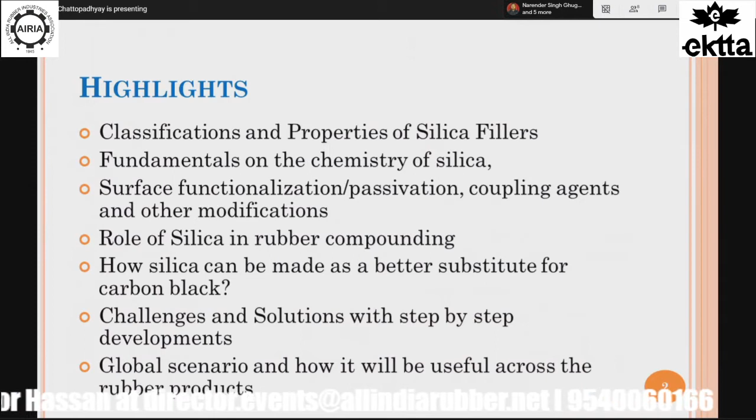Before going into details, I'll give you a quick highlight. I'll try to tell you the classification and properties of silica as a filler, then the fundamentals and chemistry of silica by which your tire, your rubber product, will be rolling, the surface functionalization and coupling agent -- that's the crucial role there -- and the role of silica in rubber compounding, how different it is compared to traditional carbon black compounds.

And then, how can you make silica a better and better substitute? Can I make it 100% substitution of carbon black at the end? What are the challenges you'll face, and then solutions step by step? And then the global scenario across -- can I really adopt it in a wide gamut of rubber products? So that's what is going to be the theme of today's talk.

Before I go into details, it's my duty to introduce you to my institution. I belong to IIT Kharagpur, as it was introduced. In fact, IIT Kharagpur is the first IIT out of the first 5 which were established immediately after the independence of India. So IIT Kharagpur was the first, followed by IIT Bombay, Delhi, Kanpur, and then Madras. Over the period of time, we have become 23 in our IIT fraternity now.

It's almost across all states of India now. If you have a look, IIT Kharagpur has 45 departments, centers and schools, and 30 plus specialized R&D centers. For your information, our campus itself is located on around 2,200 acres of land -- it's so huge, itself like a small municipality. If you look at broad disciplines, we cover almost all engineering disciplines, from computer science to naval architecture to mining, anything you can name. And then we are into the basic sciences, biosciences, social sciences, management, and also law, entertainment, and entrepreneurship everywhere.

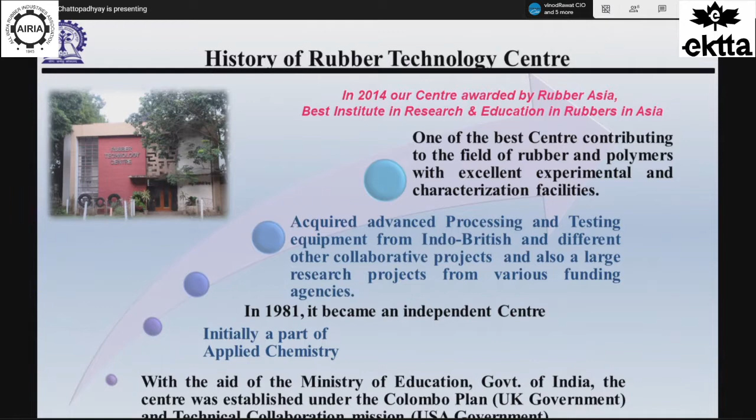We have many programs. We not only teach Masters and PhD students, but also offer a lot of short-term courses. For industry, we offer courses training the manpower, which is part of our curriculum. We also host international conferences and so on.

We have about 6 faculty members today, working in various areas of polymer science and rubber technology. I am currently leading the center. Other than faculty, we have 4 non-teaching staff, about 46 MTech students, and 50 PhD students.

Most importantly, see our impact on the country. Although we are small, in the last 5 years we have published more than 4,000 publications in international journals, patents, book chapters, international conferences, and many more.

Now coming to the location of IIT Kharagpur, it's a little far from Kolkata, about a 2 to 2.5 hour journey by car from the Calcutta airport. But we are really well connected by railways—at one point the Eastern headquarters was Kharagpur. If you look at the map, we are equidistant from Baleshwar, Jamshedpur, Kolkata, Kalyani, and Haldia.

This part of the country pioneered rubber and polymer technology, and there were a lot of industries around. I'll show you the industries IIT Kharagpur caters to: Himadri Chemicals, which makes fillers, Phoenix Conveyor Belts in Kalyani, Exide Battery, Haldia Petrochemical, and Birla Tire in Baleshwar. It's almost like a circle surrounding us.

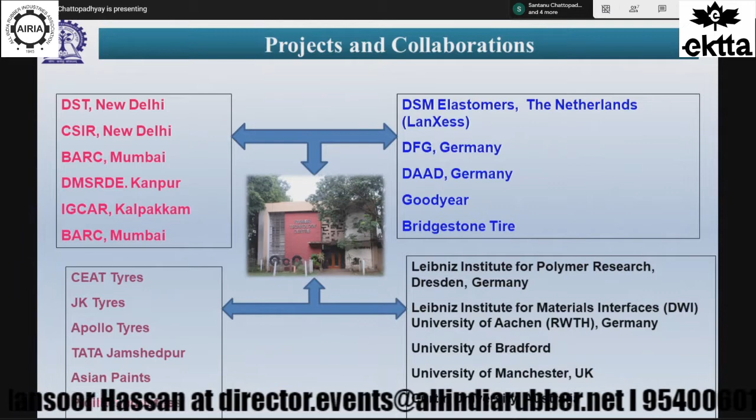If you look at the kind of tie-ups we have, we cover almost all government agencies. We are tied up with big multinationals like DSM Elastomer, Michelin Tires, Bridgestone Tires, Goodyear Tires, and more. In the Indian scenario, we work with most rubber industries and rubber forums, including AIRIA, where I'm a regular speaker and sit on some program committees. Globally too, we are in great touch with most prominent rubber and polymer institutes.

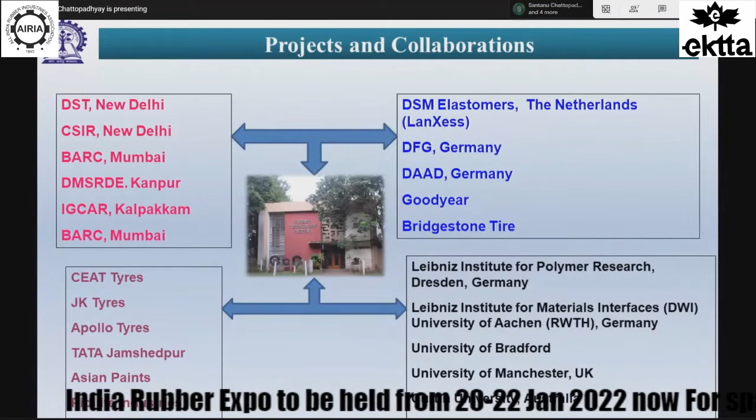We also have exchange students, and professors regularly visit for deliberations and more. This is how our global presence looks—we are all over America, Europe, Australia, New Zealand, Korea, and Japan. Many collaborations are either already there or coming up.

Coming to my research group, where I work, my research is organized into 5 verticals.

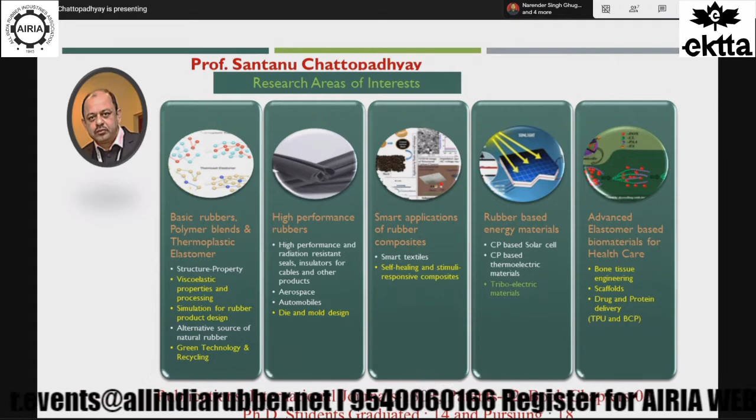The very first vertical is the basic rubber, polymer blends, thermoplastic elastomer. In that, we work with structure property, viscoelastic property and processing, simulation for rubber products for the die and mold design. Say, for example, alternative source of rubber. Say today the natural rubber source is not there, or there is some problem, so what will be the natural resources? That also we work with. And of course, the green rubber technology and recycling.

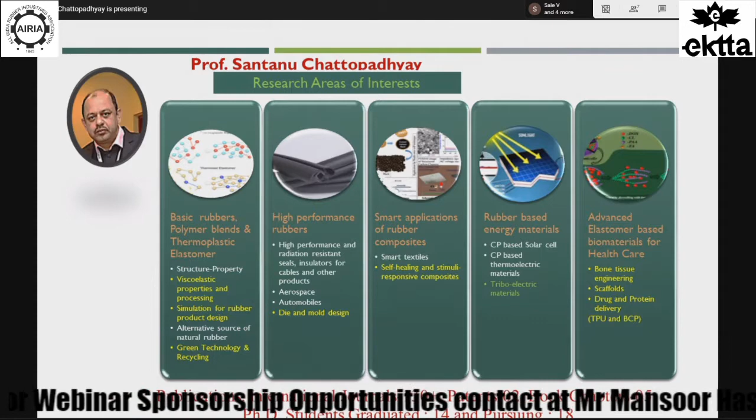So today's talk broadly covers the green technology in the line of silica, basically. Other than that, we work with high performance rubber that includes automotive, aerospace, and mostly very critical applications like high performance seals, O-rings, hoses. In smart applications, today is a smart world everywhere. I work on smart textiles, self-healing, and stimuli responsive polymers as well.

In the energy facet, today there is a huge crisis of energy, so rubbers are not far off. If you look at rubber polymeric material as a solar cell material, thermoelectric material, triboelectric material, that is very important. If you really do friction, can you harvest the energy out of that?

Another facet: in today's COVID situation, you can realize how important drug and antiviral delivery is. In that facet also, we work on stimuli responsive and controlled drug, protein and vaccine delivery, scaffolds, and bone tissue engineering. Of course, this is not today's focus. I'm going to focus today on a different area, which is silica, but that comes under the verticals of basic rubber and polymer technology.

So without taking much time, I'll straight away take you to my content. I'll give a quick introduction, then the history, how silica was developed, then classification and properties, and surface chemistry, which is very important. Rather than the bulk, the surface is very important for fillers. The role of silica in rubber compounding; carbon black and silica we'll compare, to see where silica has edges and where the disadvantages are. The basic challenges you face once you adopt silica as a replacement of carbon black, the solutions, the worldwide demand, and finally the references you can consult.

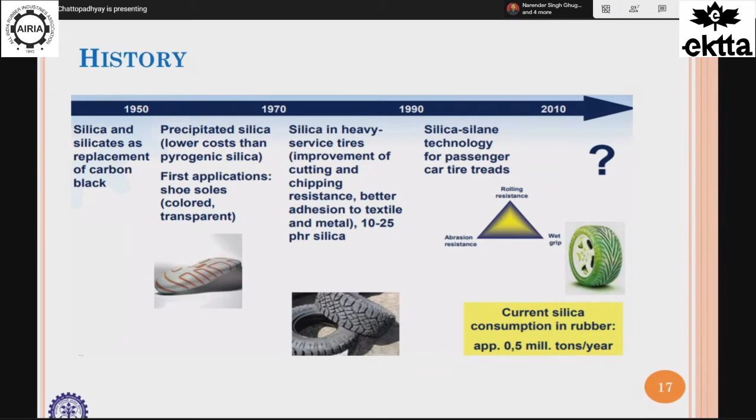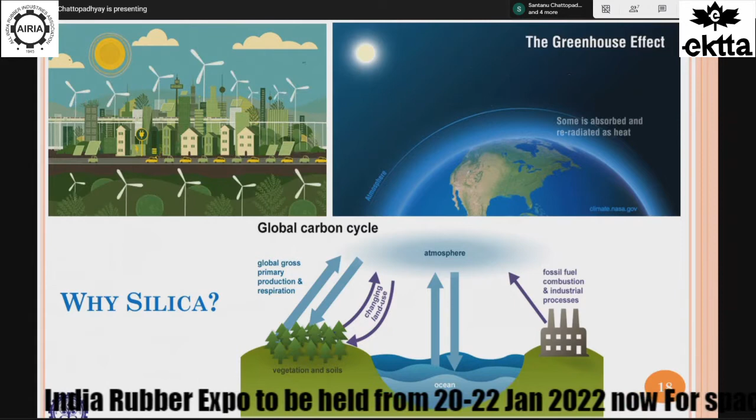So in order to make our earth green, in order not to have this sort of interference from carbon, silica is probably one of the major solutions. Because you can imagine how much carbon black is consumed in the form of rubber, keeping aside the other uses.

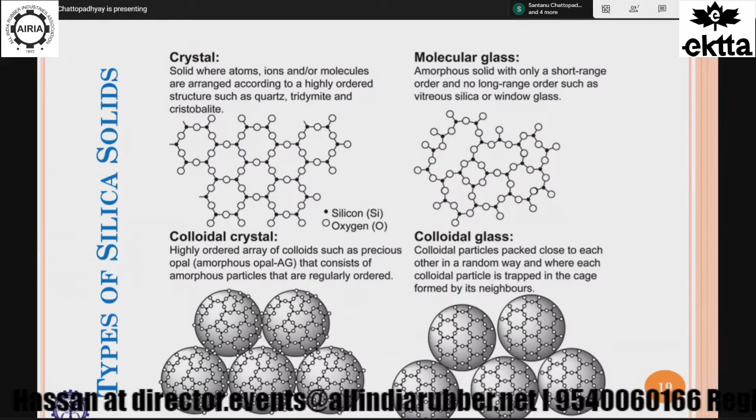So now taking you to a little bit of the chemistry and physics of silica first. If you look at silica and the types, as I said, it is crystals. It appears in the form of quartz, for example. It can be molecular glasses. Molecular glasses means it's a little bit hexagonal, but a little distorted. So it doesn't have a long range order, it only has a short range order. The very first example is vitreous silica, your window glasses.

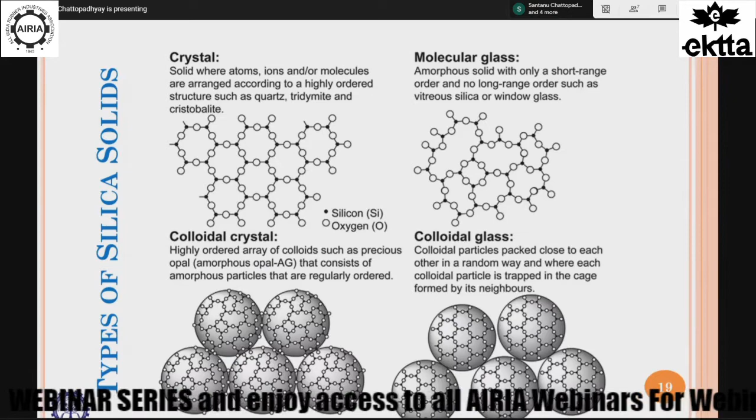Another form of silica is colloidal crystal, like amorphous opal AG, for example. That has a regular order, but in the colloidal form. And there is, of course, colloidal glass. Colloidal glass is the same as colloidal crystals, but it doesn't have a long range order.

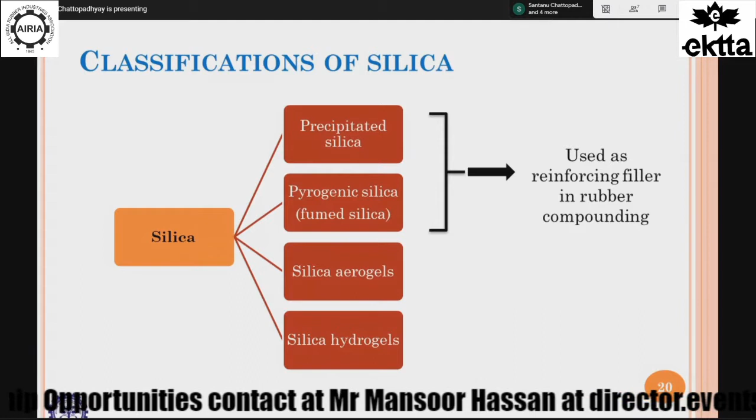Now, coming to our business, if you look at silica from our point of view, you have precipitated silica and pyrogenic silica. I'll elaborate on what is what. These two are mainly used as reinforcing fillers in rubber compounding. Two other forms of silica are silica aerogels and silica hydrogels. They have different uses. I'll elaborate a little later.

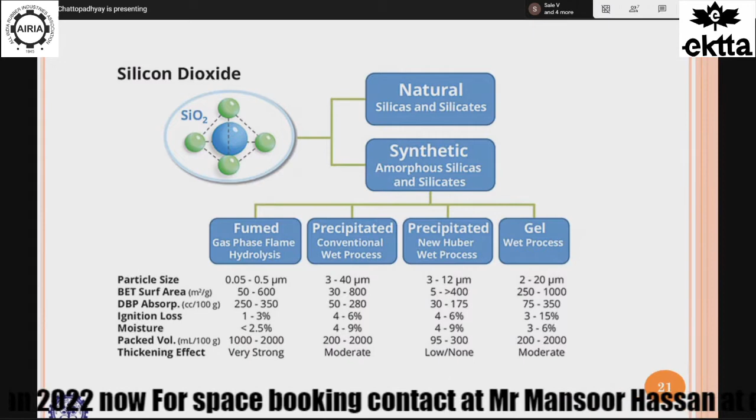So now coming to silicon dioxide, as I said, you can get it from natural sources or make it from synthetic sources. But if I try to categorize them, I can get fumed silica or pyrogenic silica, which is made by a gas phase flame hydrolysis reaction. The second one is precipitated silica, which today's talk will mostly center around. Then precipitated silica in another variety by a new Huber process. And then the gel or wet process silica.

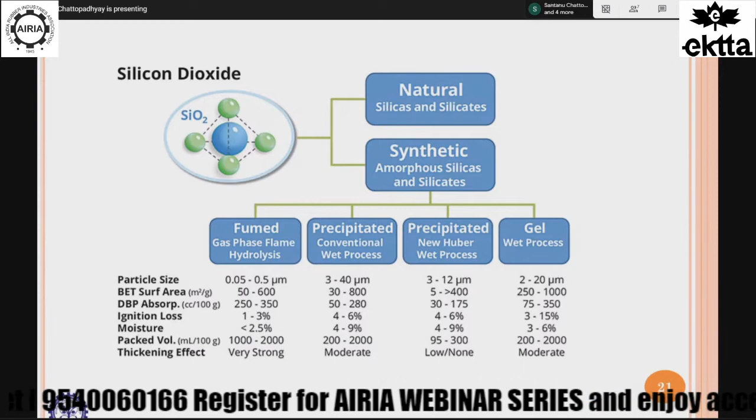Down there, some of the properties are jotted down. If you see, the particle size of fumed silica is probably the smallest. Of course, the gel also has a small size, but BET surface area, everything is changeable basically. But moisture content is a very important factor. If you look at fumed silica, it's always 2% or less. Sometimes they exaggerate 2.5, but it's actually less than 2%.

And if you look at precipitated silica, on the contrary, it is sometimes 4 to 6%, sometimes it can go all the way to 9%. And that is very important, the moisture content. So I'll take you back here in the subsequent slides.

Now taking you to the precipitated silica, because our point of focus is precipitated silica. The chemistry is very simple. You have a sodium silicate, you acidify it. Once you acidify it, it will form a salt, like sodium chloride in this case, and it will give you silicon dioxide. Similarly, if you react with sulfuric acid in presence of oxygen, it's oxidizing media, it will form sodium sulfate and silicon dioxide. So this is the chemistry of forming the silicon dioxide from the sodium silicate, which you mostly get from natural mineral sources, basically from the sands.

But although the reaction seems very, very easy to you, three important things you have to remember. One is the temperature during the processing. Second is the pH in which you actually precipitate. And third is the time of processing. So this makes a difference.

So for example, if you do it at a very low pH and a long time, you get a conventional silica. But if you do it at a high pH and short time, you get what you call today HD silica. There are a lot of markets here today. And if you do it in between, you can get a semi HD silica. So that is the chemistry. I'm not going into it; that itself would take a full day lecture.

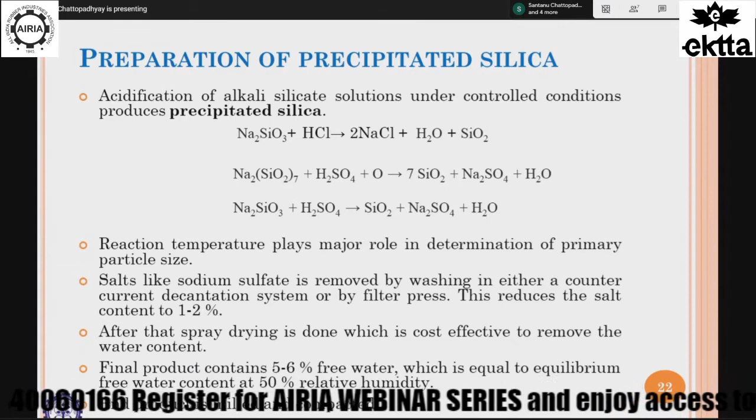But nonetheless, once you make the primary form of silica particle, you have to wash it. You have to wash it with a countercurrent decantation system, or there is something called a filter press, by which the salt content should be reduced as far as possible in the final silica. It should be of the tune of less than 1% sometimes, if you really want a better quality silica for users.

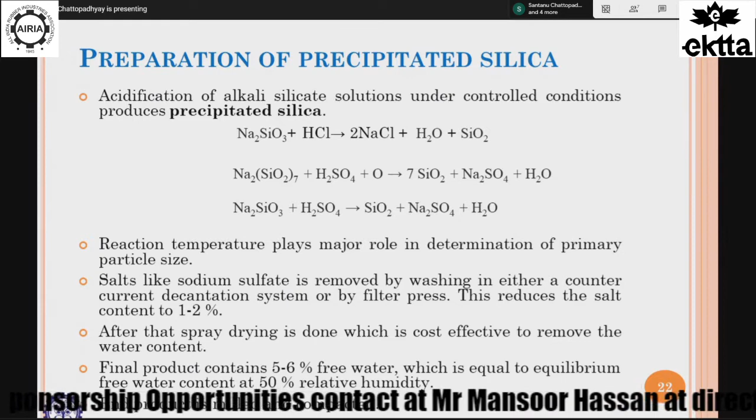And then you have a spray drying system, because you still have 30-40% water in the filter press. So you have to reduce it. The final water content should be 5 to 6%. That is very important. And then finally it is milled, compacted, packed and sold to the market. So that is basically the process.

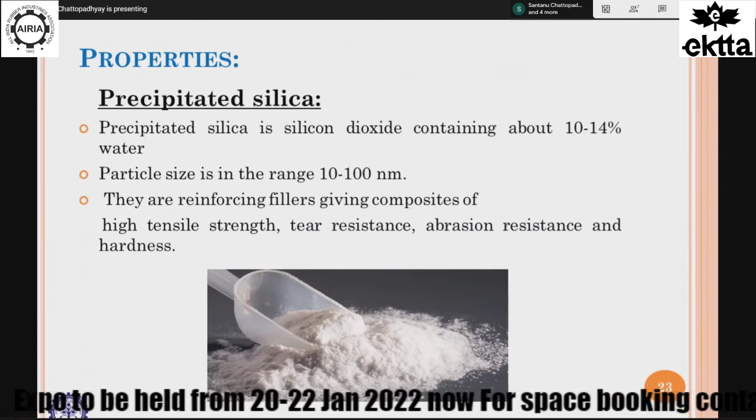So now if you have a quick glance at silicon dioxide made by the precipitation or wet process, you call it precipitated silica. Although it's a little exaggerated, 10% moisture content; it should ideally be less than 6% for good quality. Otherwise, you have to really dry it while compounding with rubber. The particle size is of the tune of 10 to 100 nanometers, but talking about particle size is very tricky because silica exists in aggregated form. That is most important. Carbon black also exists in an aggregated form, but the aggregate size compared to carbon black is finer. I'm coming to that.

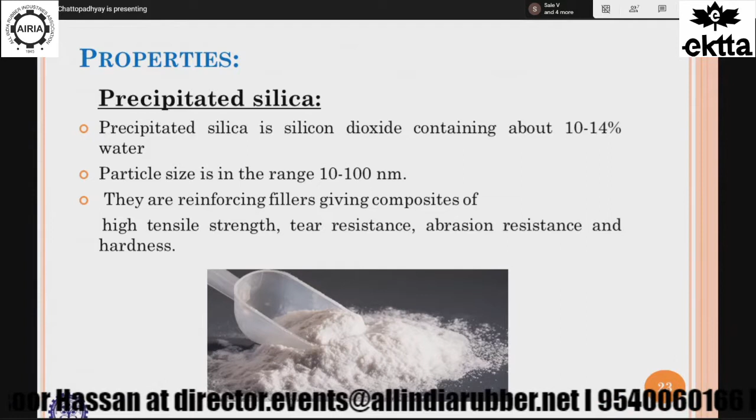So this gives you a primary particle size of less than 45 nanometers. That gives you the optimum reinforcement. Thereby you can improve the tensile strength, tear strength, abrasion resistance, and all the failure properties.

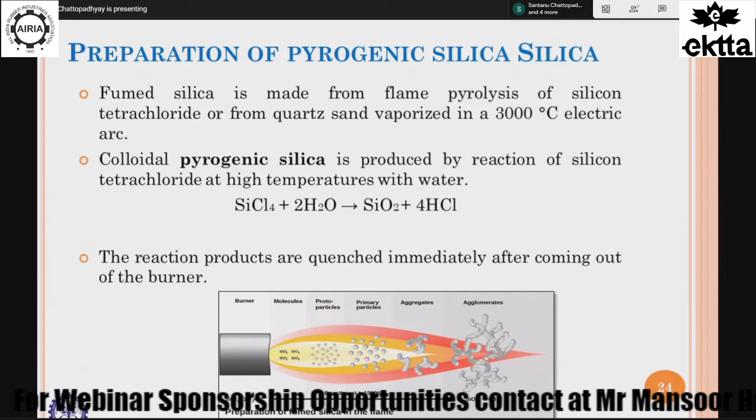Now taking you to pyrogenic silica. Pyrogenic silica is made from chlorosilane, basically silicon tetrachloride, and it can be made directly from quartz also. The temperature is very high, and once silicon dioxide is formed by the reaction of water and SiCl4, it has to be immediately quenched, and then subsequently processed. Since the process is very high temperature, your moisture content is much less. As I told you, it's less than 2% in this case.

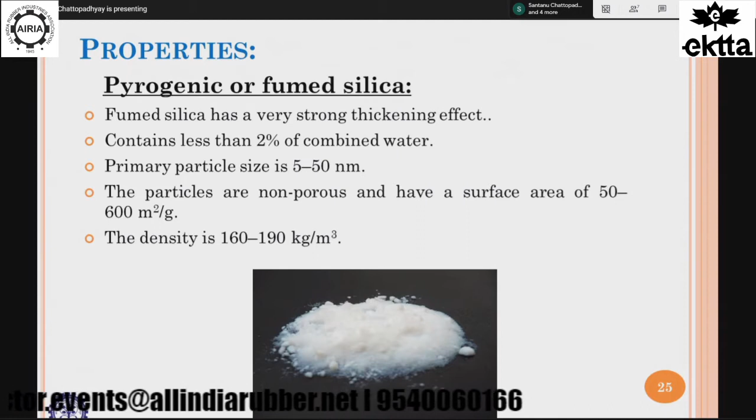So let us have a quick look at fumed silica, for example. Fumed silica has a very strong thickening effect. It's very, very hard, just like soft clay versus hard clay, for those who know. It contains 2% or less combined water. Primary particle size, remember, is 5 to 50 nanometers. The state of aggregation is quite less, but it aggregates because of this particle size. And it has a huge surface area. As for density, if you compare carbon black and these two types of silica, carbon black is a little lower density compared to silica, but there is really little difference.

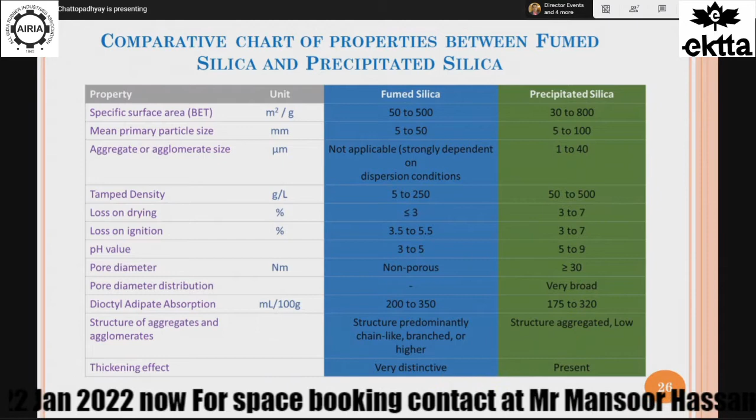So I'll stop over here. Just have a glance through the slides. That gives you a very good comparison between the basic properties of fumed silica versus precipitated silica. Starting from specific surface area, that is very important. Higher the surface area, higher the reinforcement, basically. And then mean particle size, different types of density, and loss on drying. Loss on drying is related to the moisture content.

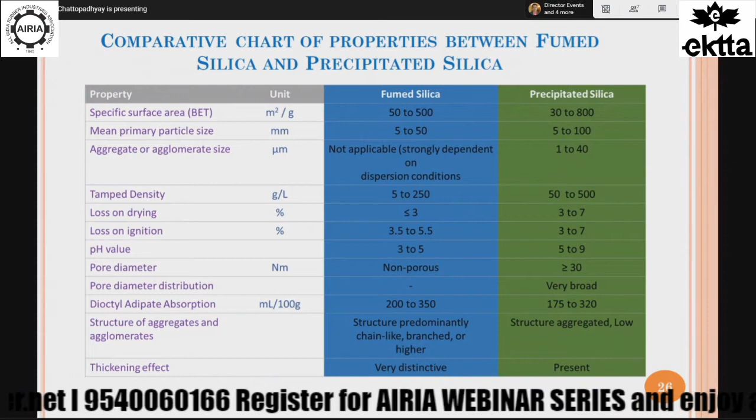pH value plays a very, very important role, because when you vulcanize rubber, most often your acceleration is done because of basic conditions. So if you have a little basicity, that's how carbon blacks are modified.

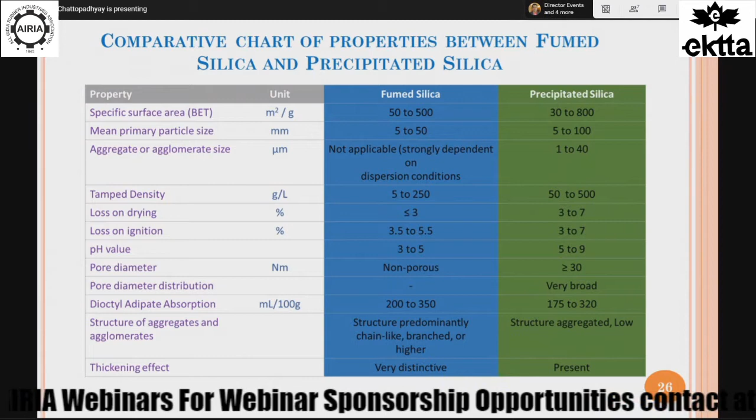Vicinal silica is highly hydrogen bonded, so you cannot effectively use that functionality to tailor-make it to reinforce a rubber. The isolated silica, designated as Q3, and the geminal silica, which is Q2, are the most reactive SiOH bonds that you can actually functionalize. So these two groups play a very critical role.

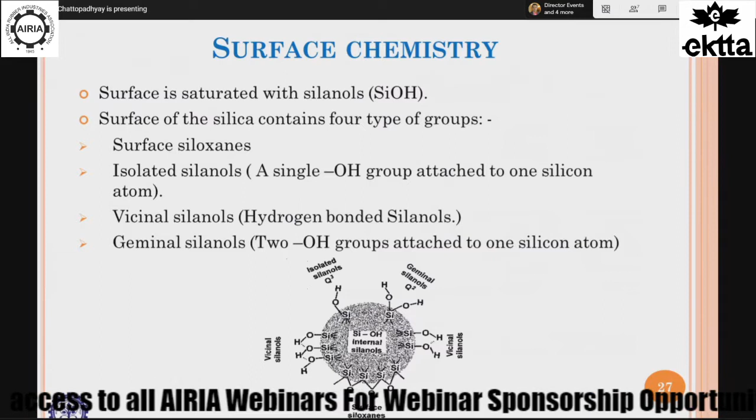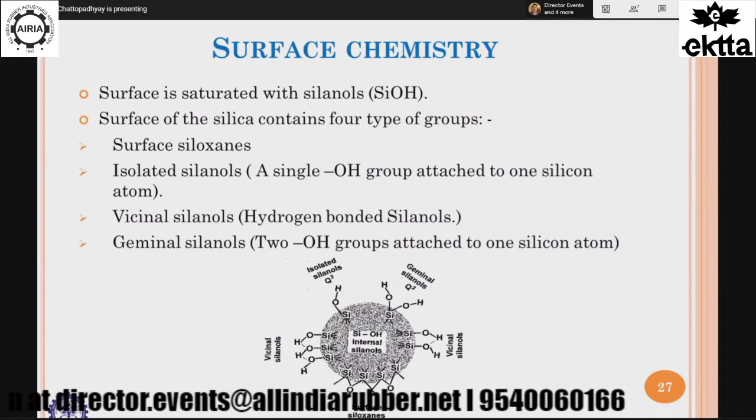Now I'm coming back to precipitated silica vis-à-vis fumed silica. Fumed silica, as you make it at a very high temperature, has less SiOH content compared to precipitated silica. That makes fumed silica difficult to disperse in the rubber matrix, because with a coupling agent it will not be that easy to couple. So, a quick recap: fumed silica has less moisture, which is an advantage, but less functionality, which is its utmost disadvantage for effectively reinforcing rubbers. Does it make sense?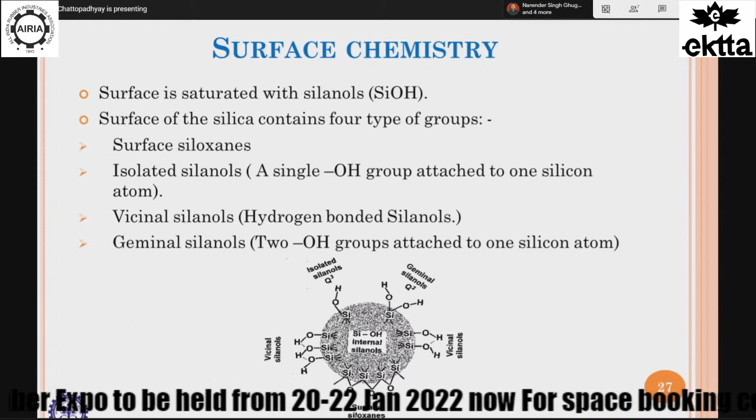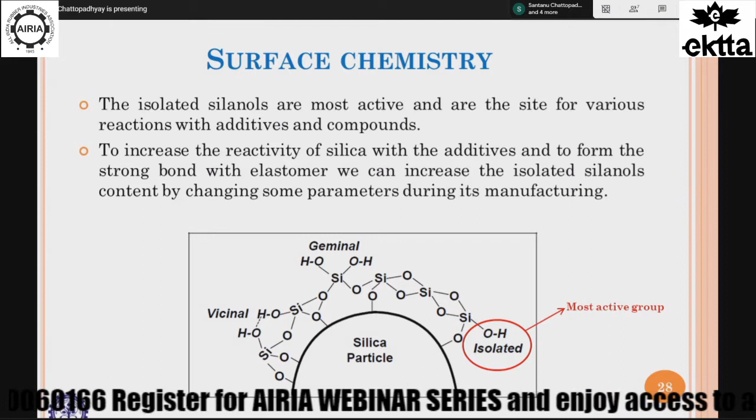Once again, you have 4 different types of functionality. Of those, recall 2: your free SiOH group and your geminal SiOH group. Geminal means Si(OH)2. These 2 groups play a crucial role when you put more and more silica into the rubber. In the cartoon, vicinal is strongly hydrogen bonded. Si-O-Si, forget about that, because all 4 valencies are satisfied. The most reactive is the isolated silanol, next the geminal one. That's what we'll play with in the next 2-3 slides.

Schematically, Si(OH)4, silicic acid, condenses and forms Si-O-Si linkages that propagate in all 3 dimensions, forming the surface. This is a xerosol, and the xerosol ultimately forms your surface functionality by condensation and dehydration mechanisms: SiOH, which is isolated, and Si(OH)2, which is called geminal. These 2 are very critical for our subsequent applications.

Now let me compare the surface chemistry of silica with carbon. In the periodic table, carbon is at the top and the next row is silicon. Carbon in a form like graphite is conducting; silicon, of which semiconductors are made, is semiconductive. To the right of carbon you have nitrogen, then oxygen. For silicon, next is phosphorus, then sulfur. So most of silicon's chemistry centers around sulfur and phosphorus, whereas with carbon your playground is carbon, nitrogen and oxygen. That's what you see in the cartoon.

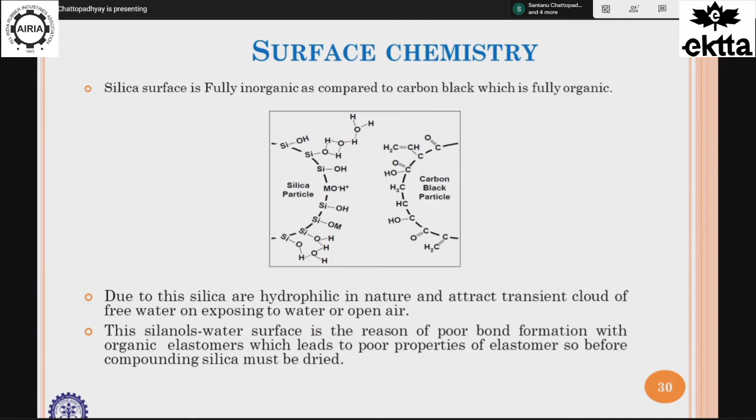Now my point is that I understand I have given a silica, but how do I know how much reactive or active functional group I have in that particular filler per gram? Okay. So for example, how much SiOH groups are present there? That is very, very critical. So to do that, you have to do characterization. What do you do? One of the major characterization techniques is NMR.

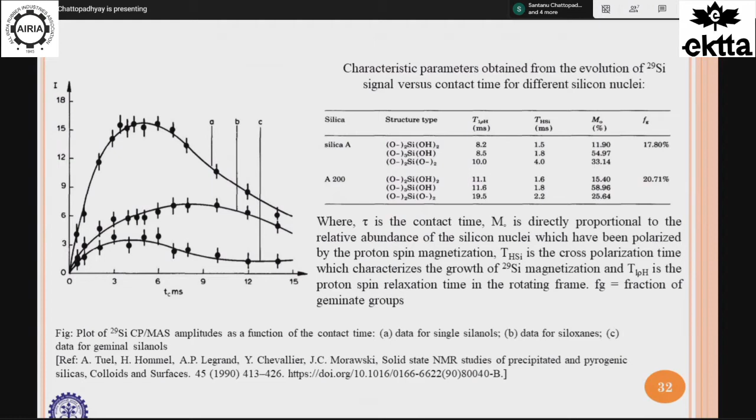So ultimately, if you integrate it, you will get how much percentage functionality you have. And depending on that, you choose your coupling agent or modifier on the silica surface so that you can optimally bond silica with the rubber surfaces. The next important characterization technique will give you the clue if my formulation is working or will be working, either in the development stage or in the quality control stage. This machine also costs you like 5 to 7 crores. It's a very expensive technique, but we recently procured it in rubber technology in IIT Kharagpur.

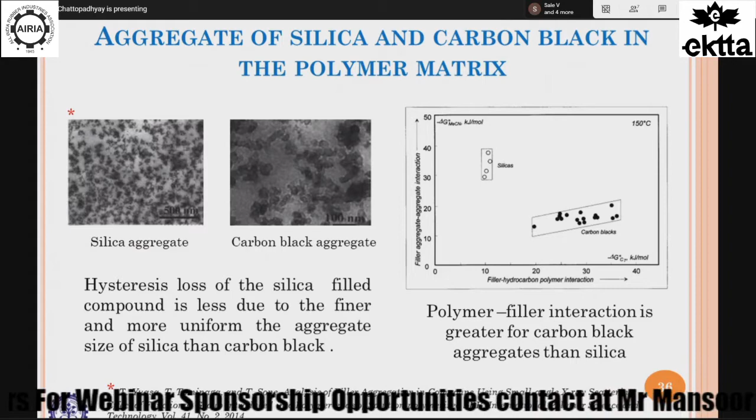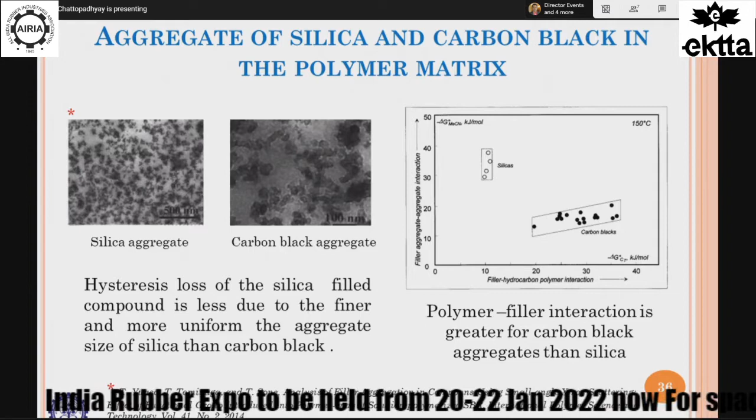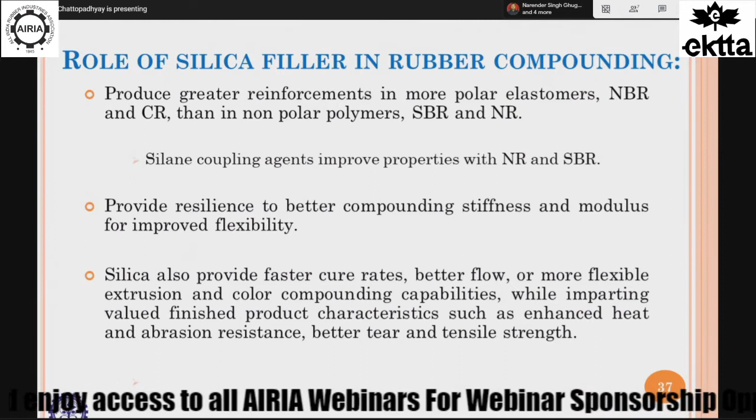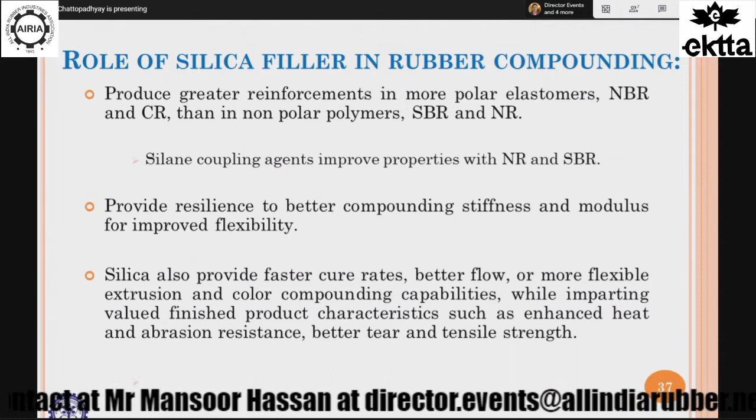Now, the role of silica in rubber compounds. There's a basic principle in chemistry: like dissolves like - it happens in society too, we only mingle with people we like. Silica has higher surface energy compared to carbon black, so naturally it goes well with polar elastomers like NBR and chloroprene rubber. But with natural rubber or SBR, silica has a natural inhibition to mix well because it's more polar while natural rubber and SBR are non-polar. So you have to somehow make it better, otherwise stiffness and modulus improvement won't be good. Nonetheless, silica has inherent characteristics - it gives faster cure rates, better flowability, and more flexibility during extrusion because the aggregate size is smaller, provided you use an optimum coupling agent while optimizing the finished product characteristics. So it gives many advantages, but ultimately its processing and mixing is a little trickier compared to carbon black.

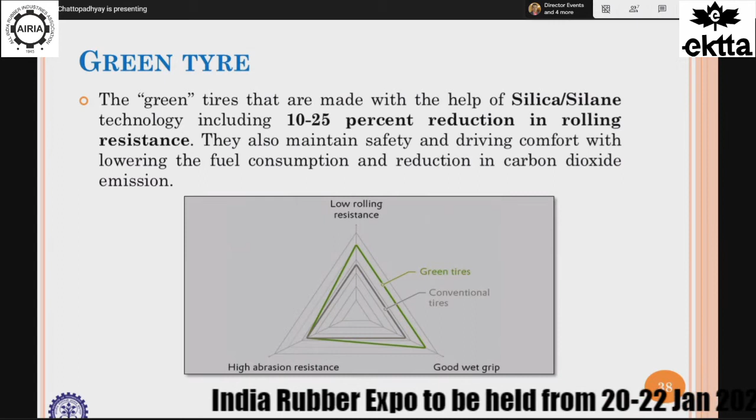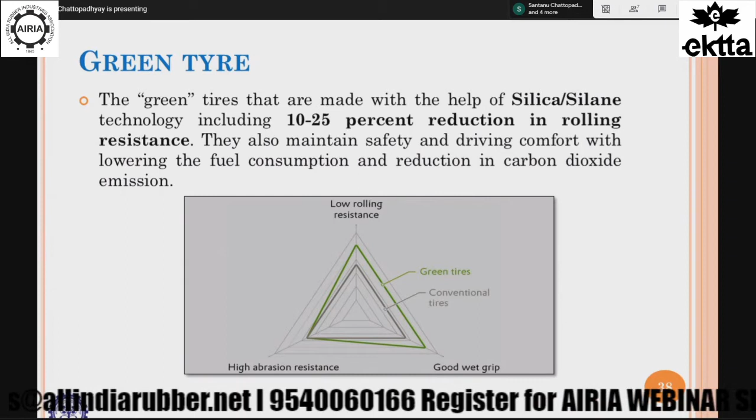So what is the green tire concept? Green tire doesn't mean it looks green in color, or that you've changed everything to eco-friendly additives like plasticizer and oil. The major component in a formulation after rubber is filler, and in many cases filler dominates. If you incorporate silica with silane - there's also non-silane technology I'll highlight - you get a 10 to 25% reduction in rolling resistance, which gives roughly 7 to 10% fuel savings. This has to maintain safety and driving comfort. There's a magic triangle showing rolling resistance, wet grip - especially important for winter tire applications - and abrasion resistance. You have good rolling resistance and wet grip for safety, but if you can't match the cost in today's world, it's very difficult to sustain.

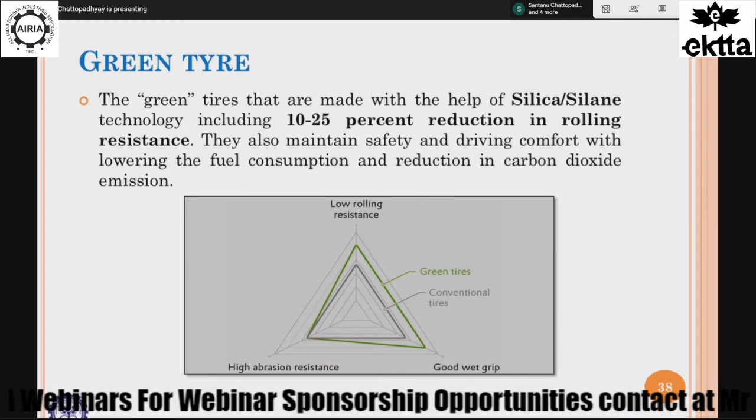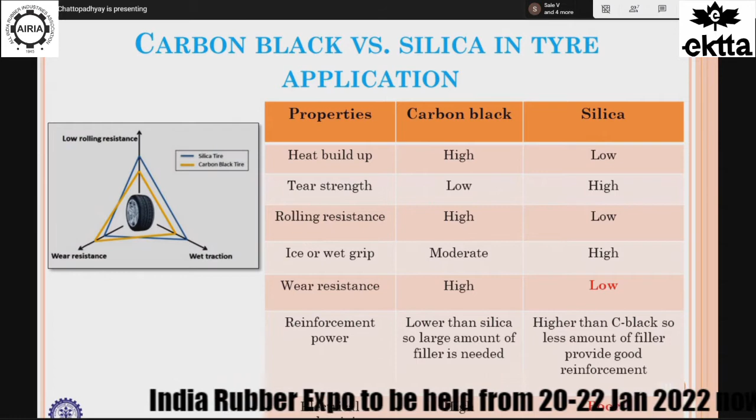If you look at the magic triangle comparing carbon black filled versus silica filled compounds, silica wins the race everywhere, except where abrasion resistance is a little lower, and for electrical conductivity. Electrical and thermal conductivity are very important - silica is a non-conductor both electrically and thermally, so it doesn't have avenues to dissipate heat. If it can't dissipate heat, there will be failure because heat accumulates and causes failure from there. That's another drawback you may face, though it can also be addressed - that's another topic I won't discuss today. Also, carbon black is a good UV absorber, while silica is not. So once you make a fully substituted compound with no carbon black whatsoever, by whatever technology, you have to compensate for wear resistance, electrical conductivity, thermal conductivity, as well as UV resistance.

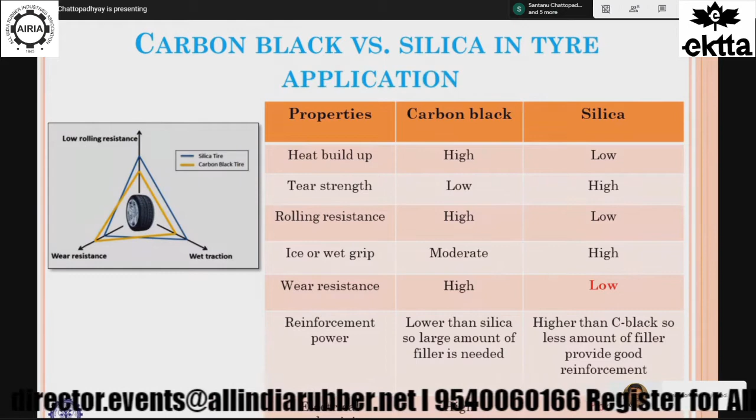The very utmost and first challenge is to disperse. Silica has a tendency to aggregate and re-aggregate, basically. That's what it's called, flocculation. So that you have to circumvent by changing the suitable mixing technique.

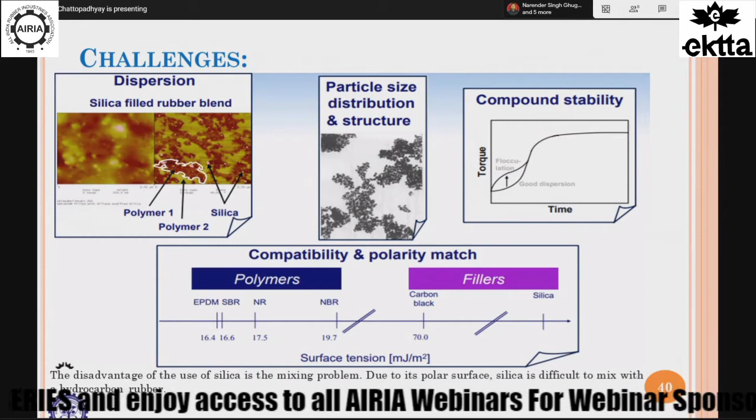For your information, with SBR, a lot of R&D has been done. They have done functionalized SBR with some functional group at the end. You have grafted SBR with different types of agents that include some sort of accelerator molecules, basically. But the point is that even if you do it, you cannot really substitute 100% carbon black.

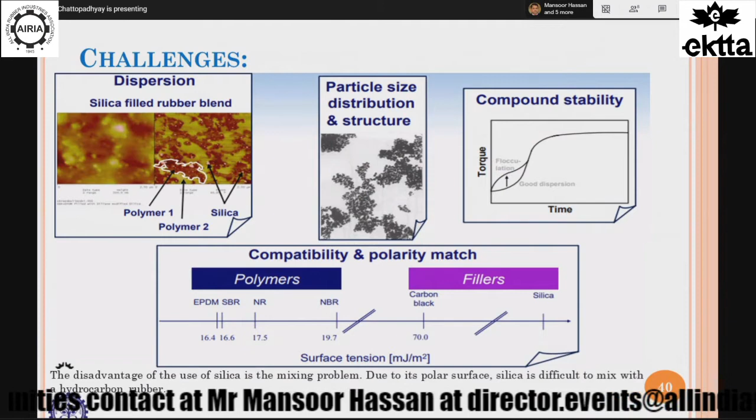But natural rubber, it is even worse. If you go by traditional melt blending techniques, I'm telling you, it's very, very difficult to go more than 10 to 15% substitution of carbon black with silica, keeping intact the other processing and other properties together. So that is a big time challenge.

The cartoon over here shows you the polarity or solubility parameter of the filler versus the rubber. You can see silica stays far apart from these non-polar materials. So somehow, some way, you have to make them compatibilized, basically, and coupled.

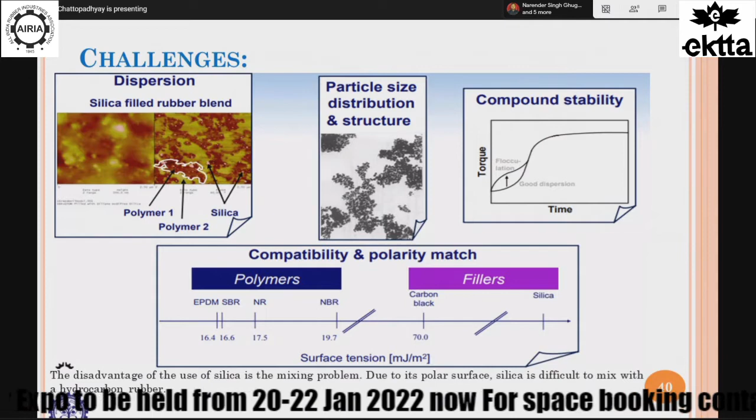So what are the solutions? The solution is using a coupling agent. You should have a molecule with two hands. One hand should hold the silica particles. The other hand should fix it to the rubber chains so that you don't have an issue of the filler particle coming out, causing wear and tear so easily. So that's what coupling is.

The second part, why not have a pseudo character? That means within my silica, if I have carbon-like surfaces, so that my wear resistance and electrical conductivity will be preserved. That is what is called CSDPF, carbon silica dual phase filler. That has come from Cabot in a big way sometimes, but it failed to have the impact that silica alone, HD silica alone, is making today, basically.

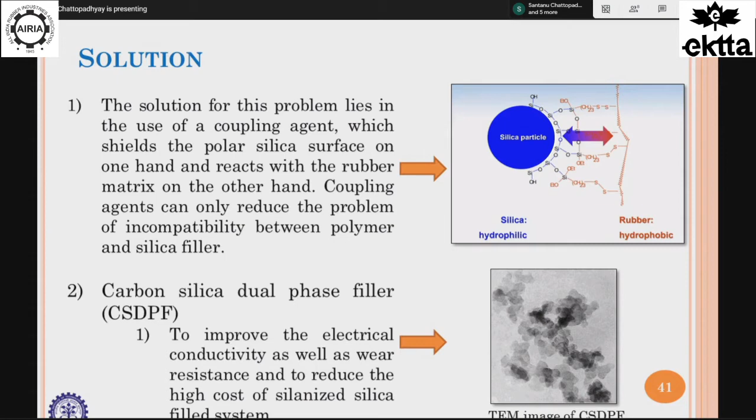So if you look at the structure, I was talking about the coupling agent. It's nothing but you have some hydrocarbon like CH2 in one part, a reactive functionality in another, and silicon with some hydrolyzable entity. This part, R group, actually reacts or interacts with the rubber chain, and this particular X3 component, X3 factor, reacts with the silica and rejoins with the silica surfaces. So you can understand it has two functionalities.

So now what about X? X can be alkoxy, it can be acyloxy, it can be halogens, it can be amine. The other part is mostly thiol, SH, mostly thiocyanate, and some other functionality. So try to understand it can be either disulfide, thiol, or thiocyanate, basically. This is the R group which can do it.

There are a wide range of chemistries. As I told you, if you look at the periodic table, next to silicon is phosphorus and sulfur. So there are many strategies nowadays. The development is happening - thioesters, thiophosphoric acid derivatives - and that works even better than the traditional silane. So that is altogether a different perspective.

For the time being, try to understand in the cartoon. You have an entity which is the silane coupling agent that has a formula just like this. So how does it work, the mechanism? The SiOCH3 group actually condenses with the silanol-rich surfaces - silanol, once again, let me point out, it's either free SiOH or it is geminal Si(OH)2.

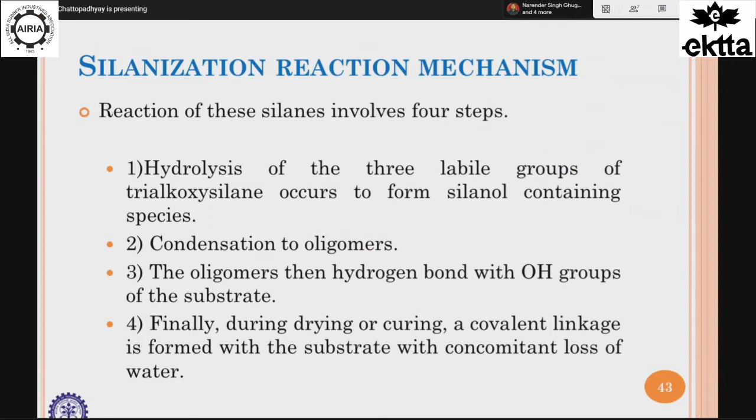So thereby, you have two ends - another sulfur, S4 or S2, that end actually links with the rubber during the process of vulcanization. So you make sure your silica has a permanent gluing effect or bonding effect with the rubber as well, not only the filler alone. So this is the reaction. Those who are from a chemistry background, I'm sure you'll love to see that.

First is the hydrolysis. To promote this reaction, there are some activators available—mostly small molecules or sometimes transition metal catalysts that will activate this reaction. And then finally it condenses, and finally you make a bond with rubber as well as a filler with the substrate.

So once again, to show you in a 3D way, you have a silica, and a silane coupling agent. For this case it's Si69, that TESPT, with silica at one end and the other, and in between there are 4 sulfurs. That 4 sulfur is very important. It reacts, it condenses having sulfur in it, and this sulfur is ready to bind with the rubber molecules—that's how the silane chemistry works, hand in hand.

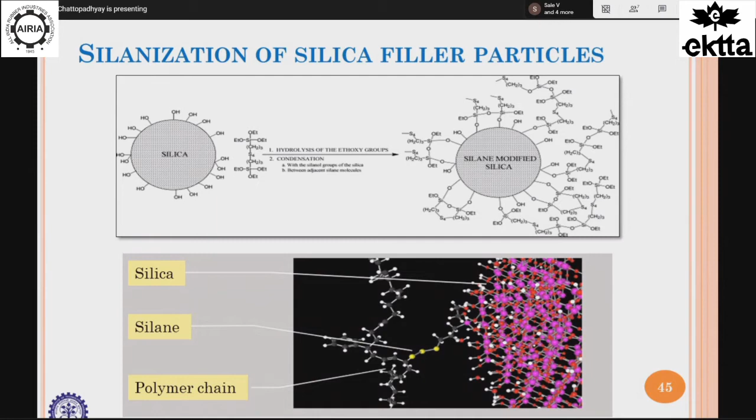Coming to the different varieties of silane, there are wide varieties—hundreds of silanes, but only a few are of commercial importance. These silane derivatives are made out of chlorosilane, that is SiCl and H. This H reacts with whatever organic functionality you want, and this alkoxy or acetoxy group you can couple with the chlorine functionality. That is how you synthesize the silane coupling agent.

There are many players—starting from Momentive, Evonik, which was the first company to start with Si69, and then Solvay, and many other players in the silane coupling agent business. But nonetheless, chemically they are similar.

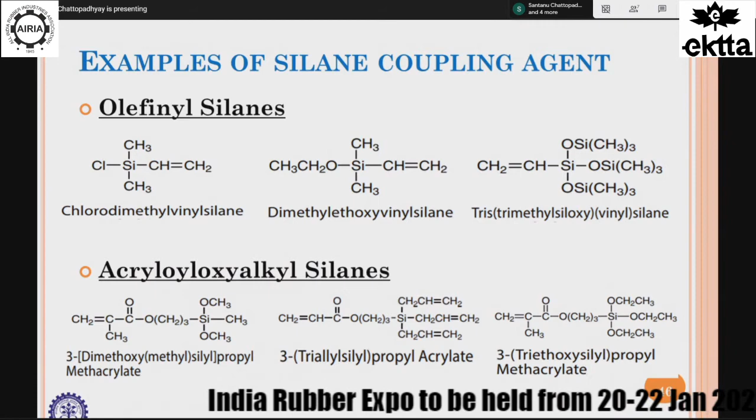But what is most important for a rubber technologist to remember? The very first silane is TESPT. Don't worry about the IUPAC chemistry—the name is big, but essentially it has 4 sulfurs, and at the end you have a silicon attached to the SiO linkage, which ultimately condenses and eliminates alcohol as a volatile.

In the second case, TESPD, you have a rank of sulfur of only 2. Why am I mentioning this? The third one, the blocked silane, ends with sulfur that is condensed or blocked with octanoic acid. Why is it so? The TESPT has 4 sulfurs, so it's more reactive—it gives additional cross-linking in the rubber system. But the problem is it has a scorching issue once you go beyond about 140 degrees during processing, giving process scorching. So TESPD was synthesized to have less risk of scorching.

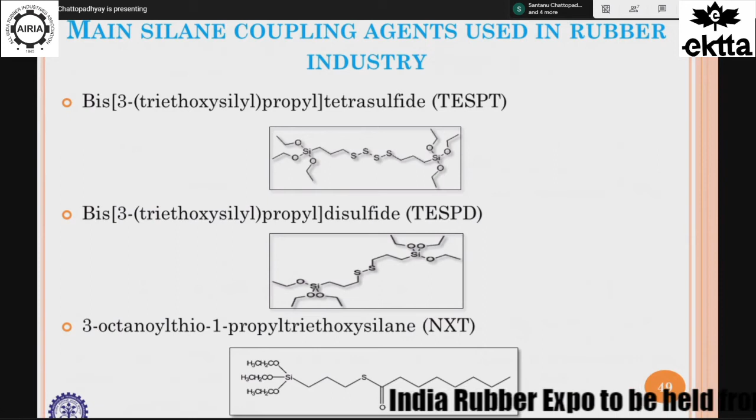But still it has a risk—it still gives a slightly higher temperature scorching problem. When mixing silica in rubber in an internal mixer, heat generation is very rapid, so if you don't control it, it's going to give you some scorchiness in your rubber product, and you don't want scorchiness during mixing, of course. All of you know those fundamentals.

The third generation is called NXT, and of course there is now a fourth generation. The third generation, as I said, is SiSH, where the H is blocked—it's a thioester basically. What this gives is a bond stable up to very high temperature, unless you activate it with some sort of activator, it will remain unreacted. So you don't have a processing safety issue during mixing—only during vulcanization, or whenever you exactly want it to be unzipped, that's when it will work.

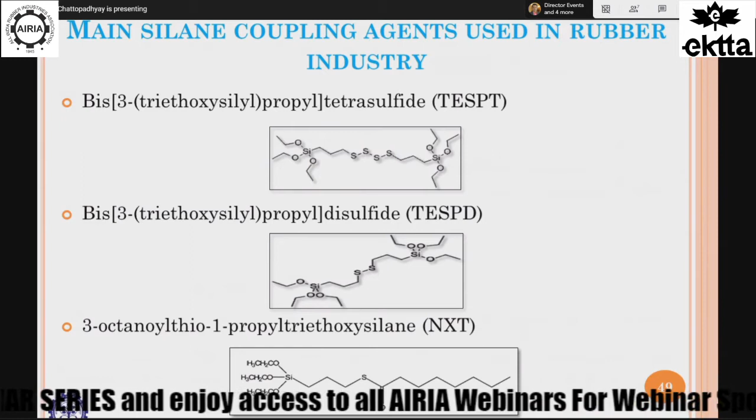So it's called blocked NXT. Blocked NXT gives you some sort of process safety. And not only that, there are some sort of silanes that can be replaced with other functionalities that can reduce the volatile content. So the next generation is called blocked as well as hindered or less volatile kind of a silane that I have not listed. That is the next generation of NXT.

So we have all 4 generations here, but NXT is very, very expensive. So even some of the multinational tire companies I recently visited abroad are still with Si69, for your information.

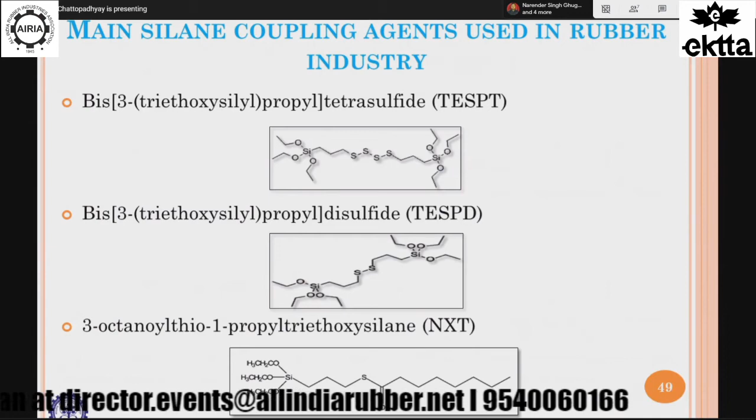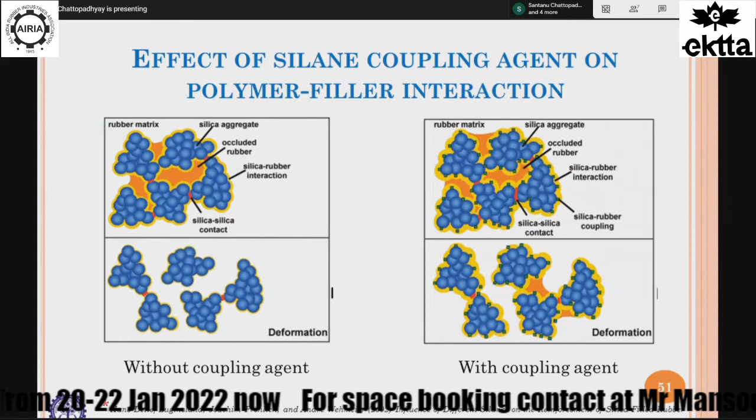So this cartoon is very important, although it looks very jumbled up. The left-hand side is without coupling agent, the right-hand side with coupling agent. Apparently, it looks the same when you have not applied any strain. Once you apply a strain, you can see that some of the things are still holding because you are gluing rubber with the coupling agent to the silica. So you have some sort of a bond. So dynamically, it's much better than the left-hand side without silane.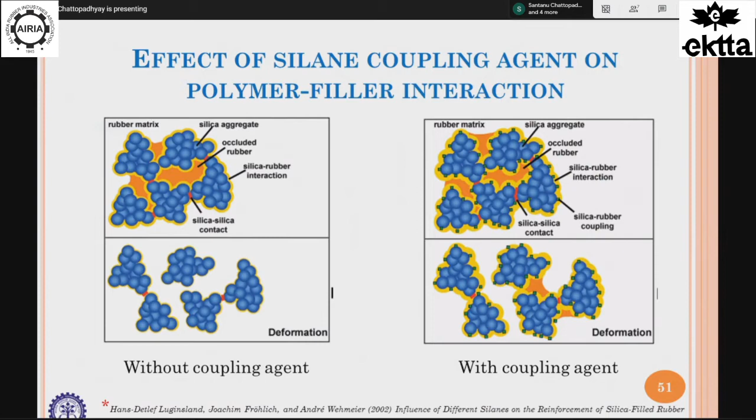So once you use silane, what are the advantages? It gives you lower heat buildup, hysteresis, because your fillers are very well dispersed in the system, having more interaction with the rubber surface. You have an increase in modulus and tensile strength, improved reinforcement effect, and the reversion character of silica is grossly reduced.

Again, I forgot one thing. Once you use silica, you have to make sure that silica does not have excess absorbed water. Whatever 6% or 2% I talked about, that you cannot eliminate. But on top of that, if you have anything else, that is going to be a problem. Number 1. Number 2, a silica surface without coupling agent may absorb a lot of your accelerator and other functionalities, giving rise to less optimum properties. So these are some of the bottlenecks you have to keep in mind while adopting silane and silica technology in your business line.

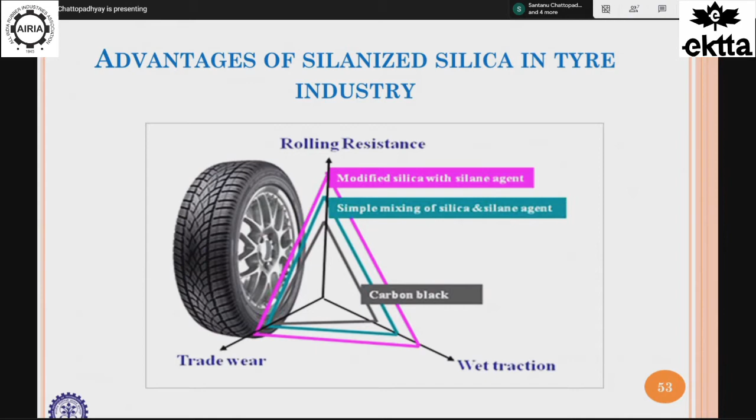So these are the advantages you have, like rolling resistance, tread wear, wet grip. Tread wear still is a problem. Carbon black is better, but there are still scopes for improvement, and you need to do a lot of R&D. Although we have done some research in rubber technology, you still have to work on that to make the other part of the triangle a little more favorable for silica.

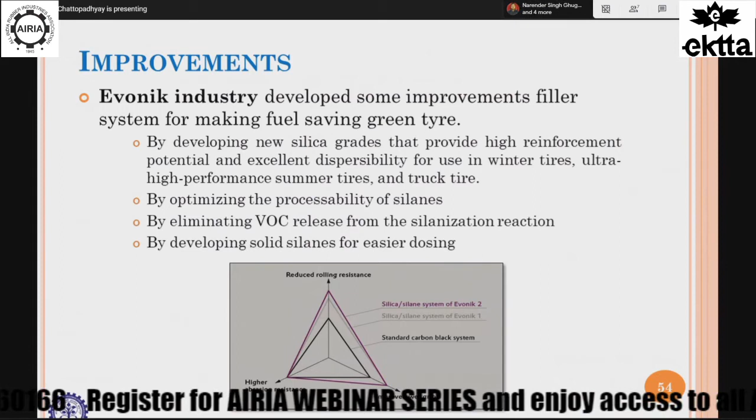Again, I have to name Evonik because they're the first who came up with that. They have now come up with inventions eliminating VOC, like Si-OEt, Si-OMe. Another thing, before I forget: with Si-OMe, OEt, and higher homologues, OMe reacts and condenses at a lower temperature, OEt at a higher temperature. And as you increase the carbon number there, it demands higher and higher temperature, for your information. So this is the chemistry.

So Evonik developed a solid silane dosing technique. That is another facet, and in a different forum, I'll try to share it with you. Not today because we already have a time constraint.

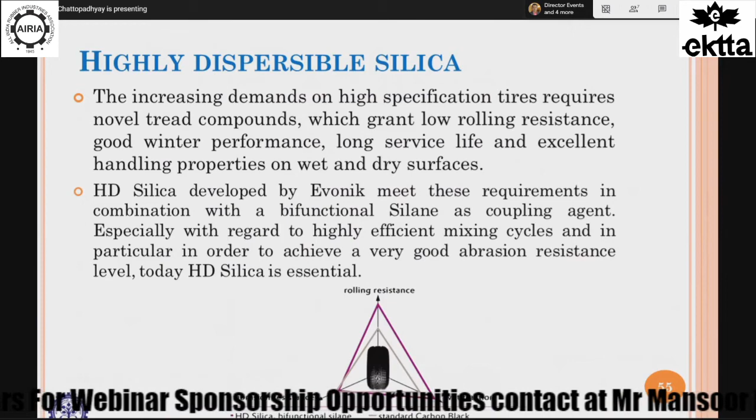By the way, how much time do I have, Mr. Singh or Mr. Hashan? Do I have 10-15 more minutes? Am I audible, Mr. Hashan? Yes, you are audible, sir. We still have another 15-20 minutes. Perfect. Okay, perfect. Thank you so much.

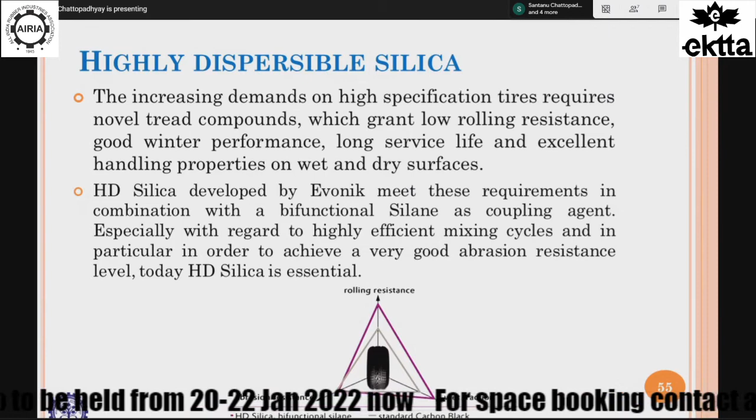I'll continue then. So coming to HD silica, it was initially developed by Evonik. The process I told you mostly relies on processing conditions like pH, time of handling, and temperature. So it has more SiOH groups compared to ordinary silica. There are two advantages for HD silica. One is it has more SiOH groups. Number 2, if you see the bimodal distribution, its aggregate size is smaller than conventional silica. So it can reduce the mixing cycle, and with less energy you'll be able to mix.

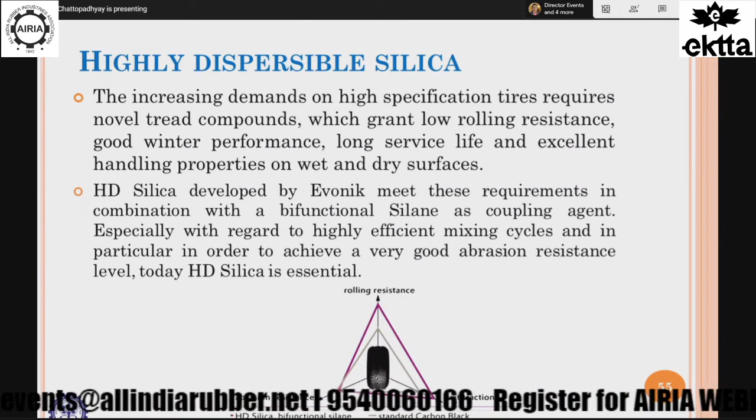So this category was taken up first, and most of the Indian companies are selling and doing well with the Indian variety. Even Madhu Silica, which I visited and have a collaboration with, their silica is quite good quality, especially the HD ones.

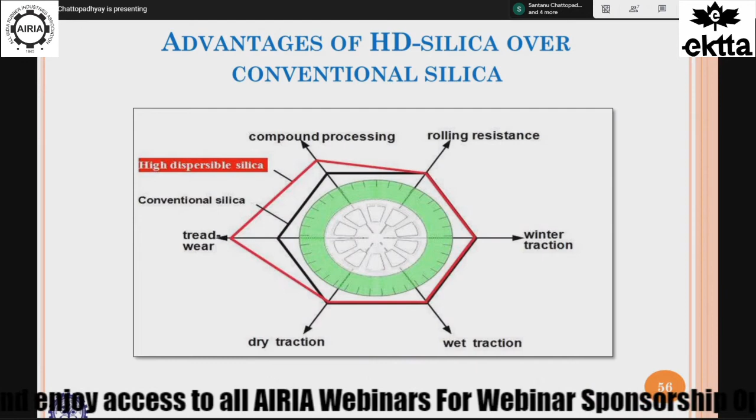So far I have been showing you the triangle, but now I will show you the hexagon, where HD silica has more edges, like compound processing, rolling resistance. The black one inside is the conventional one. The red one is the HD silica. So if you look, except probably tread wear, everywhere you have the advantage over the conventional silica.

That HD silica limitation also can be taken care of. That's a different story, and that has a lot of proprietary parts to work with. So what is the next step after HD silica? Now again, taking you quickly to the 4th generation. So far I was talking about 3 generations: Si69, that is TESPT, then disulfide, which is Si266, then Si263, which I showed you by picture, NXT, and the current generation is XP, Si466.

So what are the advantages? Si69, better coupling agent, but scorching problem. Si266 has better processing characteristics. Si263, reduced rolling resistance even further. VOC, that means your product will not be porous anymore. So volatile content you reduced.

How you reduced it? You didn't simply use SiOEt or OMe. Rather you use bifunctional or trifunctional alcohols, so that once it decouples, you don't have any volatile coming out. It will be part of your rubber molecule. So your volatile organic compound will reduce, so there is no chance your product will become porous. The third one is very, very important.

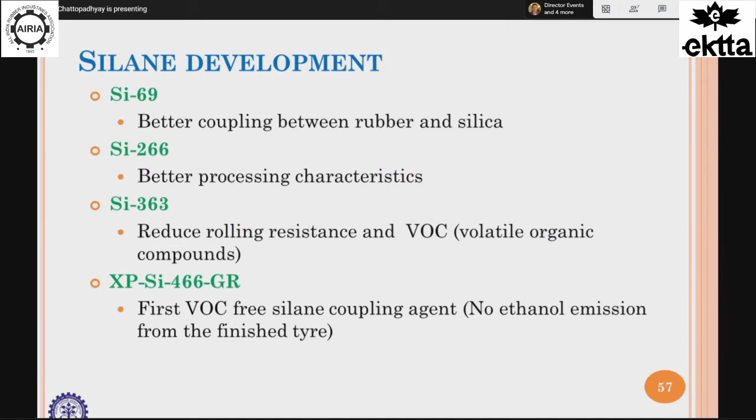But the point is that it's very, very costly. Even if you use, for your information, 10% with respect to the silica filler, it's still going to add cost to your products exorbitantly. So that is the bottleneck. So this is the silica chemistry. And not only that, thio and phosphorus chemistry I can take you through, and the recent progress today, but it will take many more hours. A mere 1 hour lecture will not suffice in that case.

Now coming quickly to CSDP, where Cabot made an impact. That is your silica, it's called co-fuming technology. Silica and these particles are made together. I showed you 2 isolated methods, fumed silica or pyrogenic silica, and precipitated silica. But here it is made together, co-fuming technology. Your carbon black as well as silica, by the process of fumed silica, are coupled together so that you have a hybrid material.

You have a silica material, mostly 5% of it has a carbon-like structure, so that whatever limitations silica has, for example wear resistance, electrical conductivity, you can make up there. So that is the technology. It has been quite challenging, quite cost effective also. At some point people thought it was going to replace all the carbon black being used. But some limitations were soon found, but still it has great potential, very challenging.

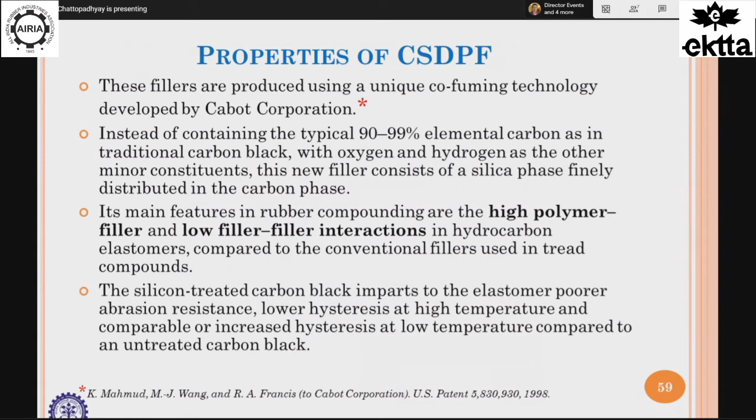Okay, so I'm not going into the details of that technology, but it itself is very interesting and fabulous. And this lesson from the CSDP, even though we are not practicing, we are taking it forward. We are taking it forward for the next days, silica technology that we can effectively use to replace.

Again, I'm emphasizing the challenges to replace carbon black 100%, to really get rid of the limitations that silica alone has, like thermal conductivity, electrical conductivity, wear resistance, and that high degree of loading, because it will give you a lot of processing problems, and that can be circumvented taking lessons from here. So I'm not going to talk about it, because it involves a lot of IPR issues. I'm not going to elaborate or dig into any details.

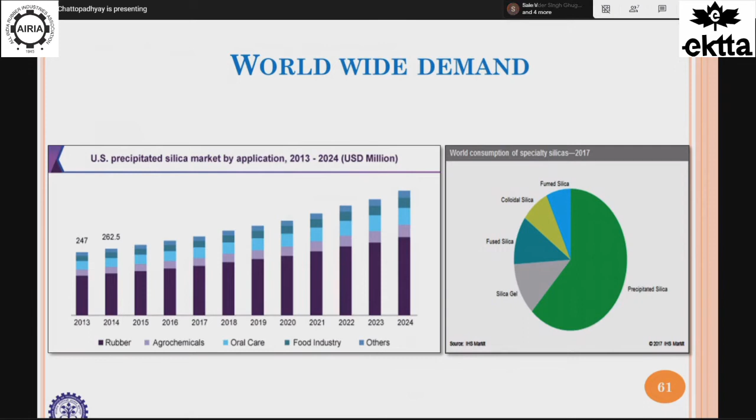So if you look at the pie chart, the lion's share of it is dominated by precipitated silica, followed by fumed and colloidal silica, then fused silica and silica gel. So that is how the market share or total usage lies. So quickly have a look. Compound annual growth rate is projected to be 7.11% for silica in rubber. Personal care 6.08, food and agro. These are the three major areas where silica is going to be used more and more.

So the 2016 market, you can see what it was. I'm sorry I could not show you 2019 and 2020. I'm sure now it is a little stagnant, so that will not give you the real picture. But more or less, you have seen the progression curve, and from there you can project where we are actually in 2021 or 2024. By 2024, the silica market is going to be dominated by rubber. It's going to be not less than 50% anyway, because, like we have adopted in tire, it's already well proven. All tire industries are doing a lot of R&D, a lot of money. Even a lot of tire companies are giving us projects for R&D activity.

So likewise, I'm very hopeful that all the rubber sectors, non-tire sectors, sooner or later are going to adopt it. For example, let me tell you one thing. Already there are energy efficient conveyor belts. The technology is the same as the rolling resistance benefit you get in tire. Similarly in hose technology, in sealings, and of course in metal to rubber bonding or metal to textile, silica has no substitute. So all our industries are going to sooner or later adopt silica and start replacing carbon black in a phase-wise manner, and it's going to dominate for sure. That's my view.

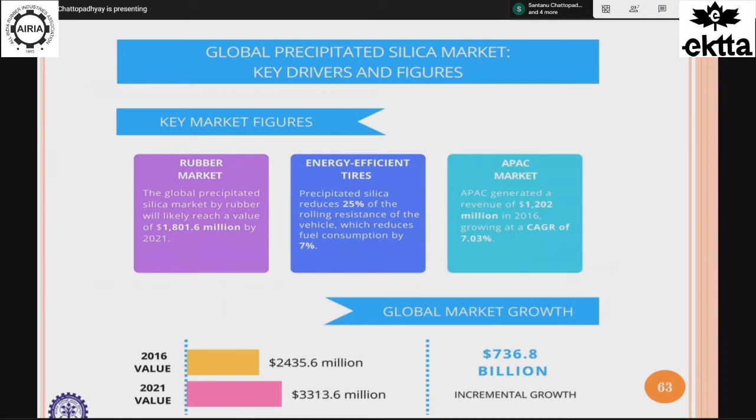So again, to show you the global picture of precipitated silica in the rubber market, how much it's going to be, 1801.6 million, and energy efficient tires mostly dominate that consumption these days, as I told you, and the Asia Pacific region growth rate is 7.03, and the incremental growth is going to touch some billion. That's the market prediction, and it has been taken from recent resources.

Once again, carbon black is used as a filler in rubber compounds, in vogue for its excellent reinforcing properties. But what are the drawbacks? Some of the dynamic properties, especially rolling resistance, wet skid resistance, winter applications, are inferior. Those can be improved by silica. Why silica? Because silica gives you lower rolling resistance. But silica alone will not do. Silica needs some sort of modification.

At present, the technology in vogue is the silane technology. But I am not elaborating more, because that has a lot of commercial prospect, although people have done it with salicylic acid derivatives and other derivatives. I showed you the derivatives, but many others are unexplored. So although we have been biased towards silane technology today, like when natural rubber was discovered, after that for all rubber we needed a link.

If I don't have a double bond, I cannot vulcanize. But soon after, when peroxide vulcanization was discovered, people knew that EPM rubber, which has much better thermal resistance properties, can be vulcanized. That doesn't have a double bond anyway, so it can be vulcanized. So silane doesn't necessarily need to be the only coupling agent that is used for rubber. There are many more avenues, for example. Already we got some very exciting results that are even better than the NXT silane agents. But again, time will tell.

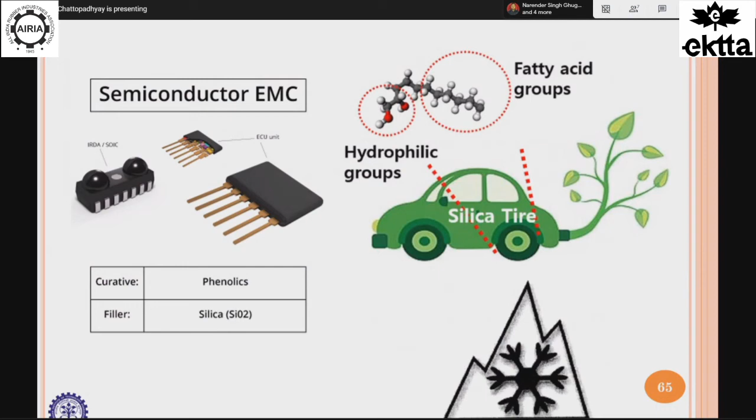So in this cartoon you can see green automotives. Why am I saying green? It's not a green color, once again. It's a tire which has many of the components derived from the plant kingdom, animal kingdom, the living world. And also this silane coupling agent can be any other fatty acid groups. If you understand the chemistry, you understand the periodic table, then you will efficiently figure out, discover, rediscover, make it an Indian kind of technology that will prosper in the future.

Other than the tire sector, if you look quickly, I'm showing you the other gamut where colloidal silica can be used: adhesives, bonding hardware, gel bonding with the fillers, laminations, fairing. So that way you can have some alternate uses of the silica as well.

So once again, I'll talk about my group. Other than all the traditional rubber technology facilities, we have some additional facilities that make us stronger for research and development. At present we have about 18 students working in the group, and many of them are working on silica technology alone. They're trying to come out with an alternative to the silane coupling agent. I showed you the area which we cover.